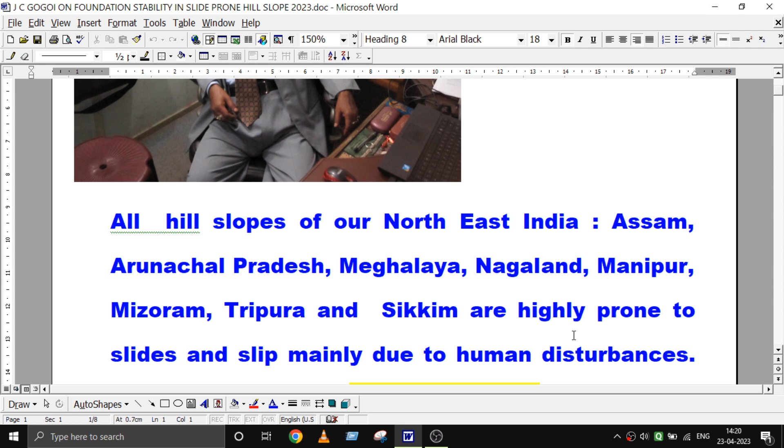Even our adjacent country, Bhutan, also notices many slides nowadays. Earlier, Bhutan was completely stable. There was no report of any slides.

I am always commenting that all natural slopes, hill slopes, are stable unless otherwise disturbed by humans. Due to natural calamities like earthquakes...

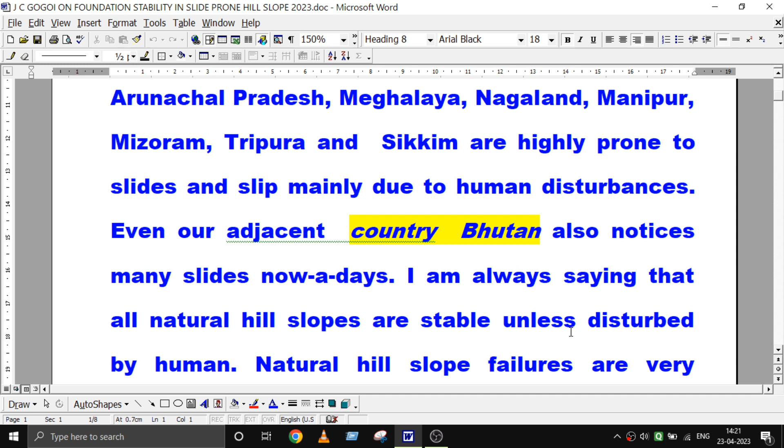basically, swift earthquakes have disturbed our formation to a great extent, but due to natural calamities, our natural hill slope failures are very negligible.

Destruction of hill slopes during the Great Assam earthquake of 1897, measuring Richter scale 8.3, and 1950, measuring Richter scale 8.7.

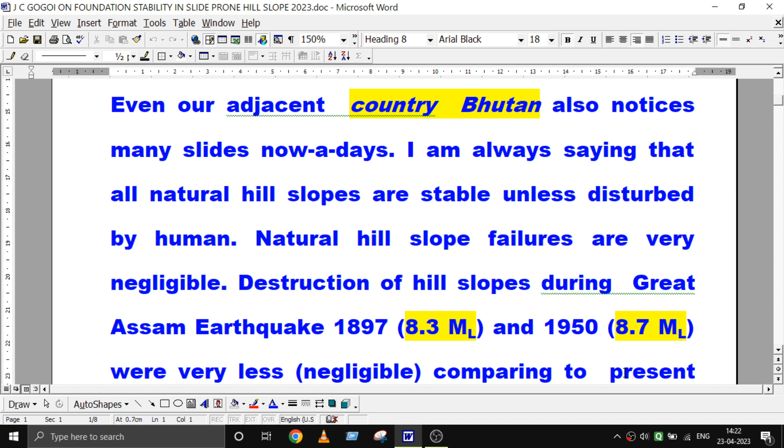These slides were very less, very negligible compared to present days. Of course, during those two major earthquakes, these are the biggest earthquakes in northeastern India.

8.7 is the biggest one, and the second is 8.3. These two earthquakes are the biggest in the northeastern region.

Of course, during these events, some destruction like river bank erosion, river course changes were noticed.

creating some dead channels. There are a lot of dead channels in Assam, like Mora Bharali, that is the Bharali river. It is a big river, but it has changed its course.

Many rivers had changed their course, some bank erosion, embankment erosion, damage of railway lines, etc. were noticed.

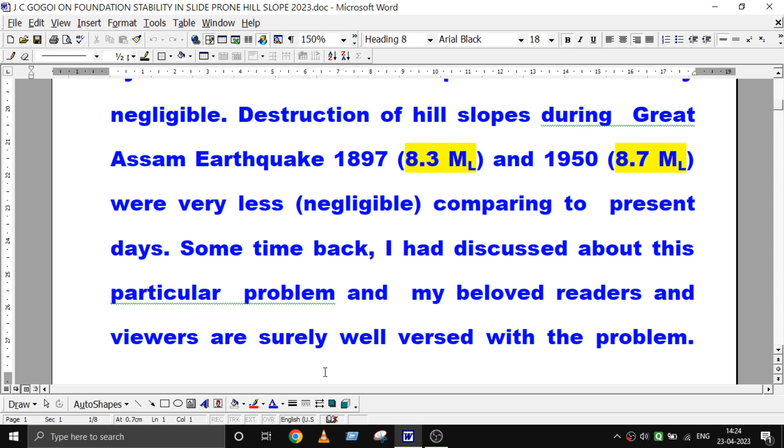Some time back, I had discussed this particular problem, and I hope my beloved readers, beloved friends, and viewers are surely well versed with the problem.

The basic reason behind these slides is that we do not care for our grandchildren, or we do not want to give them a healthy future. For that reason, we are not interested in saving our mother earth.

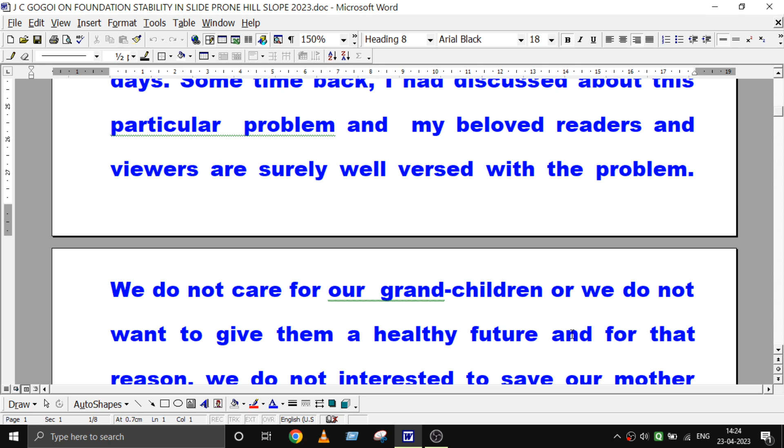We must follow nature. We cannot direct nature to behave at our own will, but we should follow the rules of nature, which we are not doing at all.

In the name of development works, we have always started construction of roads, cutting huge landmass - huge hill slopes we are cutting.

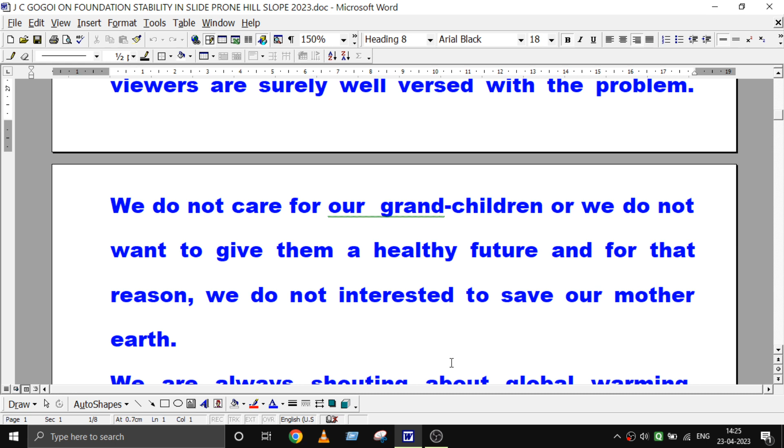and we are finishing our jungles, and a lot of destruction we are always creating on our earth's surface.

Yes, we do not do anything. We are always shouting about global warming, climate change, ice melting.

hot air waves, raising of water level above the present mean sea level.

and we are celebrating World Environment Day, World Forest Day, World Earth Day, World Wildlife Day, and many more.

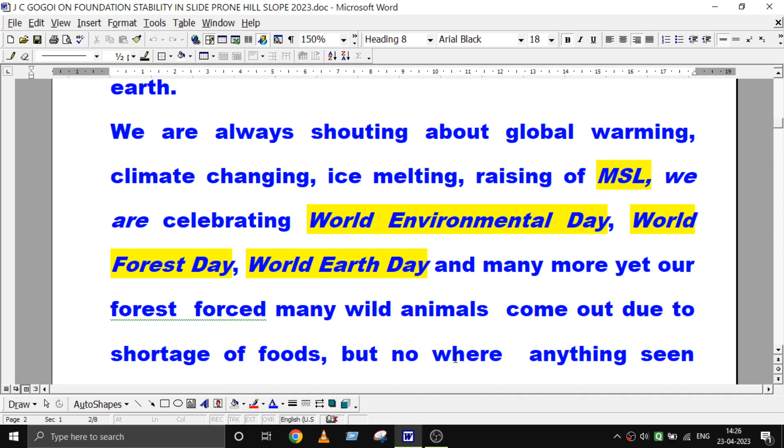Yet our forests force many wild animals to come out from the jungle due to shortage of food. But nowhere is anything being noticed...

except some workshops, seminars, conferences, talk shows, and this type of thing - only some valuable articles were published, and nothing more than that.

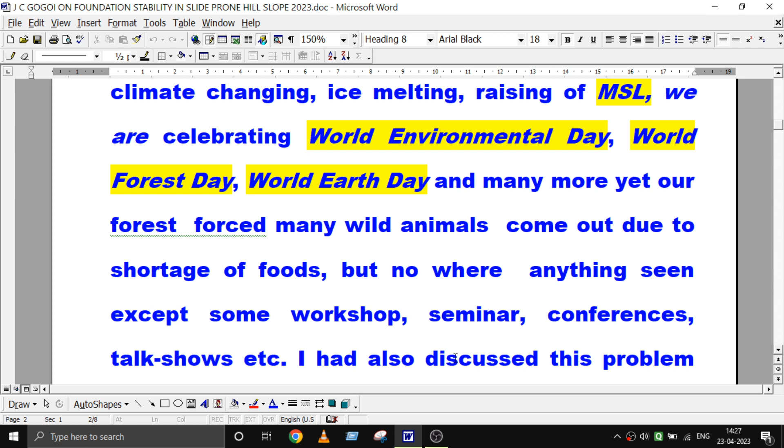At least in my notice, I find nothing. I had discussed this problem some time back regarding this man and wildlife conflict. I hope my beloved friends shall surely recall it.

However, these are the general pieces of information I am interested to give you, because much of you, or all of you, are not aware of this problem of our northeastern people. We are daily facing, we are daily suffering from this situation.

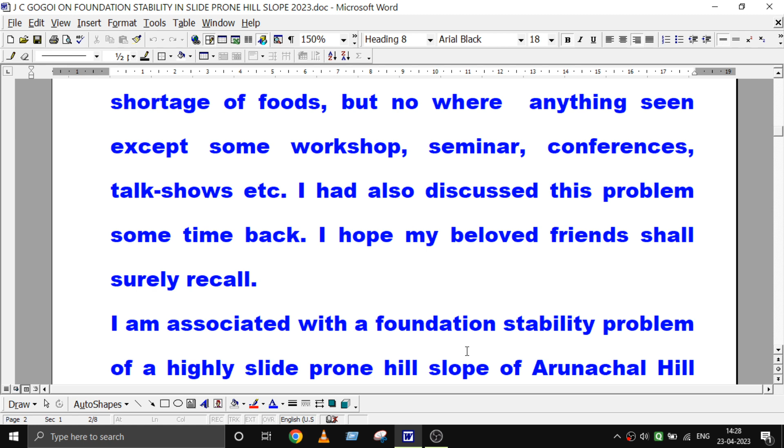At present, I am associated with the foundation stability problems of a highly slide-prone hill slope of Arunachal Hill, located at latitude 27 degrees 32 minutes 55.6 seconds

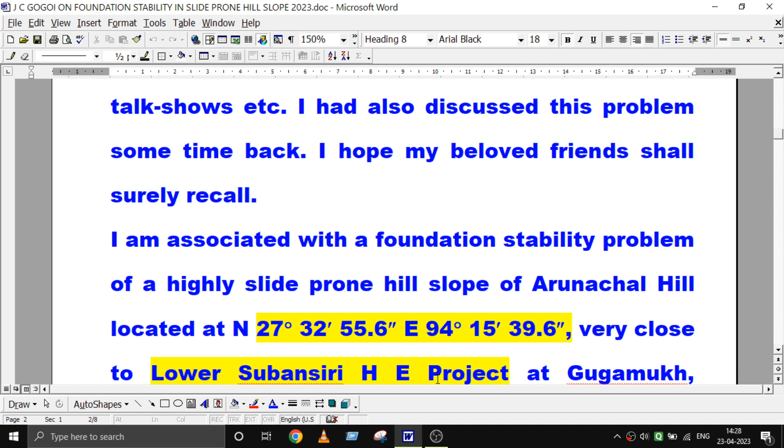and longitude 94 degrees 15 minutes 39.6 seconds. The site is very close to the Lower Subansiri hydroelectric project at Gugamukh, Dhemaji.

The formation is such that in Subansiri there are three major hydro projects. One is Upper Subansiri, which is located in Arunachal Pradesh at Upper Rish, and the Middle Subansiri, which is located at Taman, Arunachal Pradesh.

and the Lower Subansiri, it is located at the boundary line of Assam and Arunachal Pradesh.

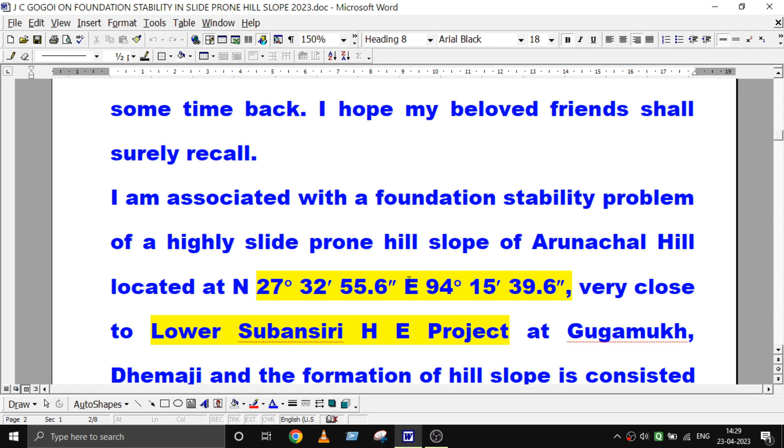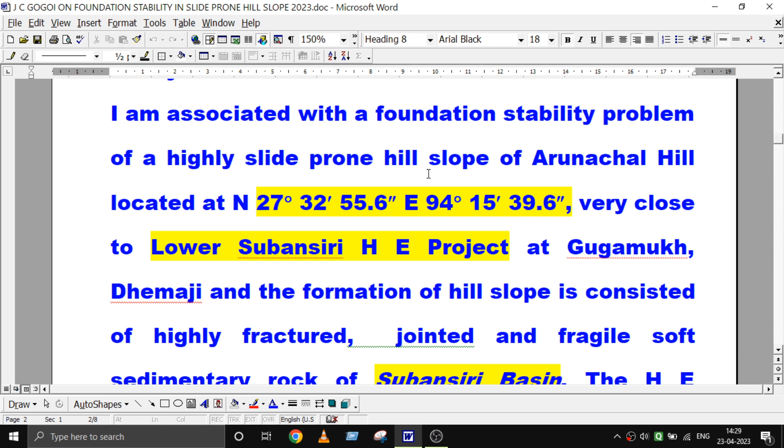The formation of the hill slope consists of highly fractured, jointed, fragile soft sedimentary rock of the Subansiri Basin. The hydroelectric project works are highly affected by landslides and slips. Many times structural collapses are noticed, like guardrail failure, blockage of tunnels, and more. They are always suffering huge cost involvement and long time effects.

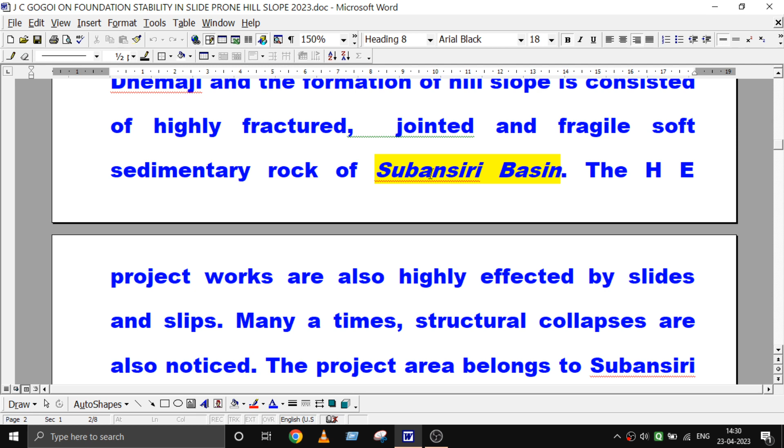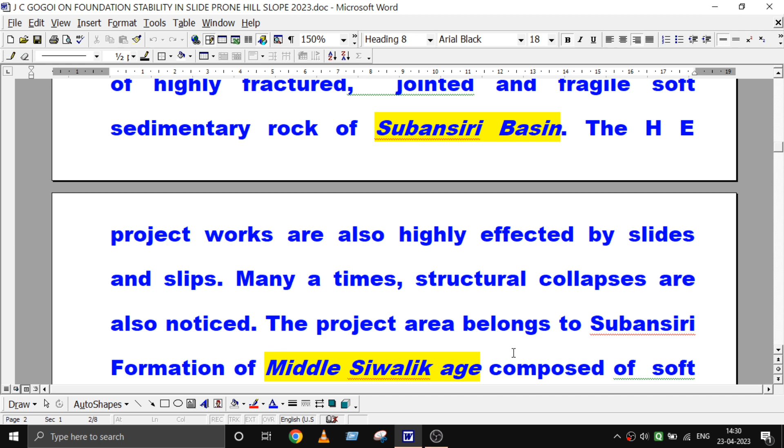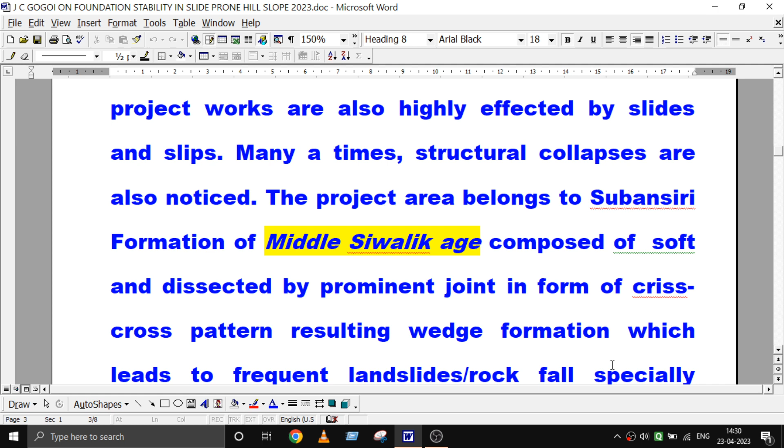The project area belongs to Subansiri Formation of Middle Siwalik, composed of soft rock dissected by prominent joints in a crisscross pattern, resulting in wedge formation which leads to frequent landslide and rockfall, especially during monsoon period. The parent sandstone is fully charged with rainwater along the subsurface water, which is vulnerable to the stability of the sandstone.

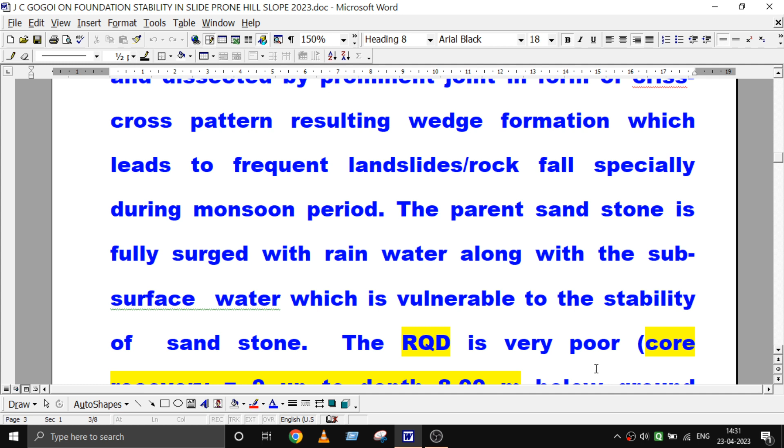Very interesting thing - we are saying it is sandstone, but it is so heavily jointed and fractured that RQD is very poor. Even core recovery up to a depth of 8 meters was recorded at zero.

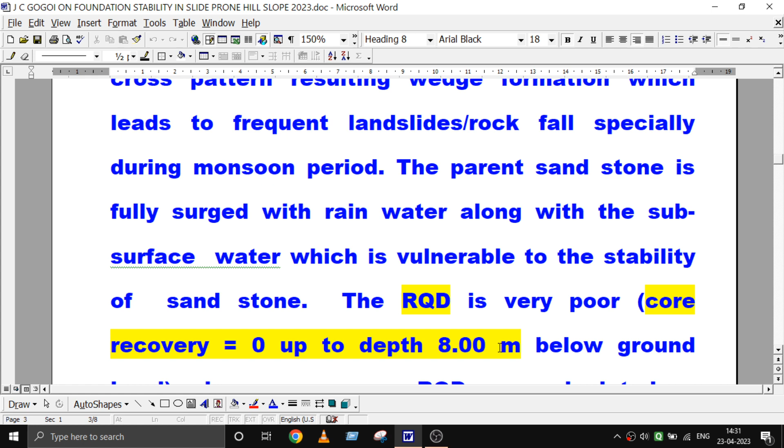We have made a few bores there, drill holes, up to the significant depth of the foundation, which is about 18-20 meters below the foundation level. So this RQD, average RQD, is recorded as 29% only.

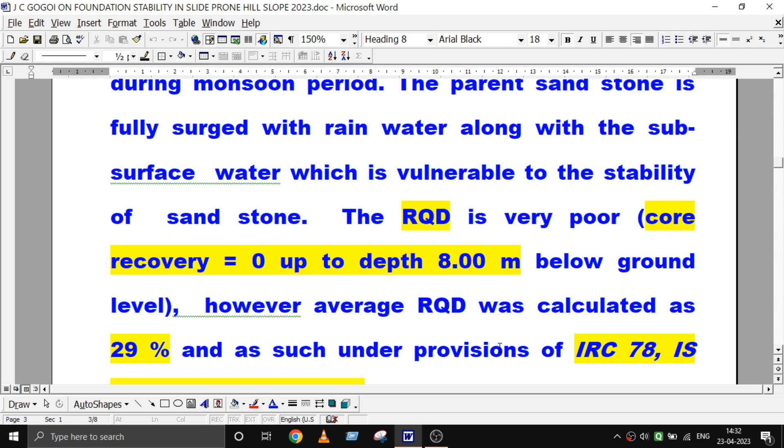Our Indian codes - IS, IRC, Indian Railway Board - do not have specification regarding slope stability. Normally, they are also following IS and IRC codes. As per our condition, Indian standards IRC 78, IS 4464, and IS 11315, the formation has been considered as grade 4 rock, which is decomposed rock. As per IS 1498 also, this type of rock is decomposed rock.

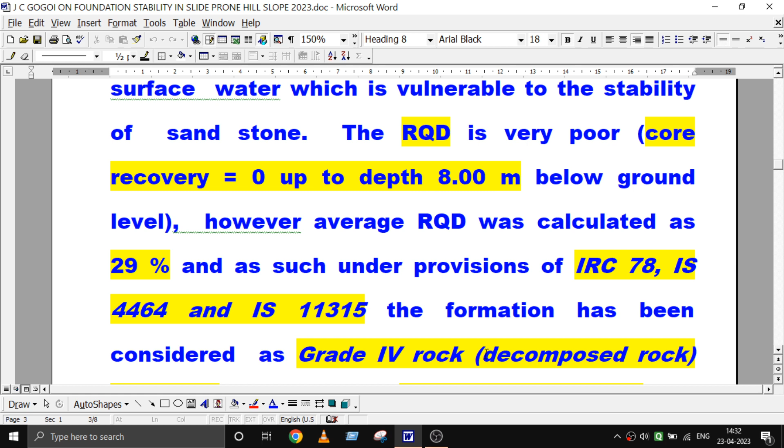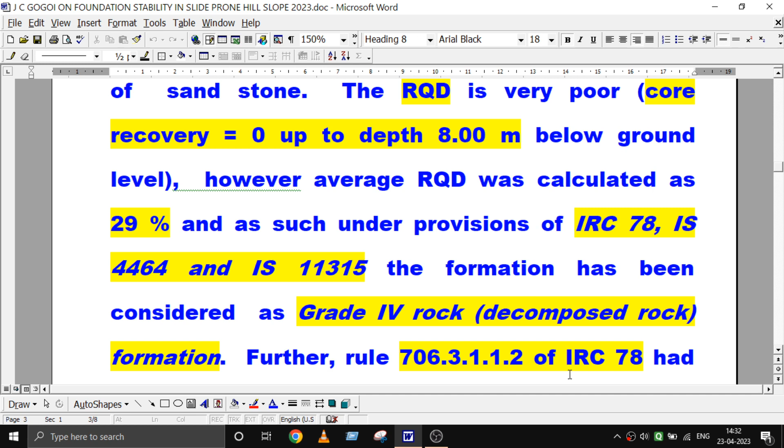Further, Rule 706.3.1.1.2 of IRC 78 recommends considering this type of formation as soil only, not rock. Just after little degradation of the quality, it will be considered as poorly graded granular soil - it will be poorly graded SP. Even all the cuttings appear like poorly graded medium grain sand.

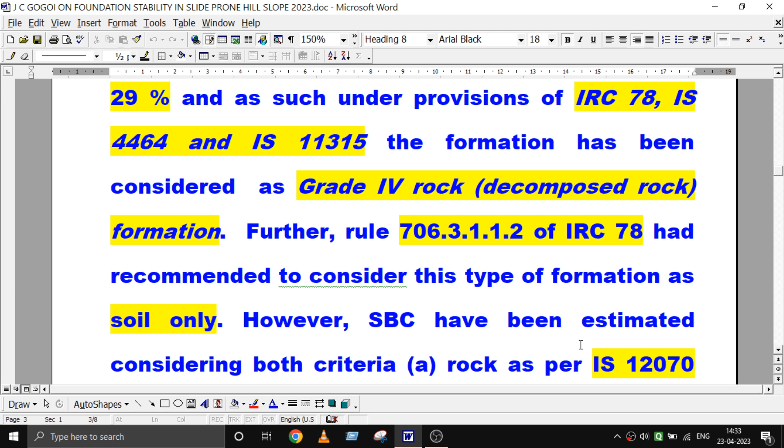However, SBC has been estimated considering it as rock using provisions of IS 12070 and IS 13063, and accordingly, if we consider it as soil, IS 6403, 8009, and IS 1904, adopting a safety factor of 8 for rock and 3 for soil.

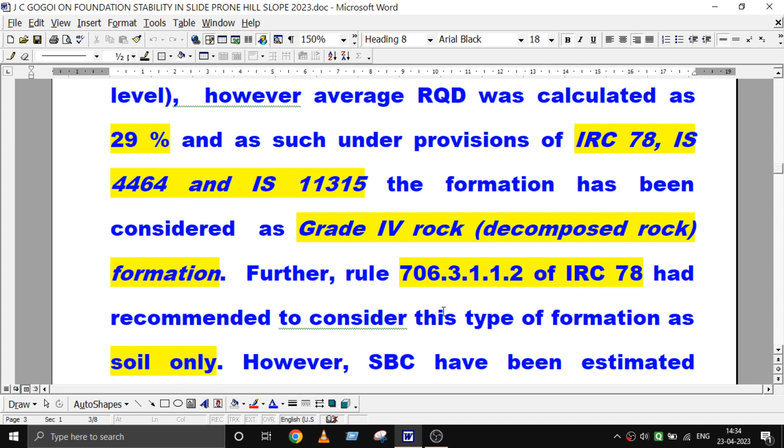This IS 12070 is the code for estimation of SBC based on field and laboratory test results, where joint frequency, joint spacing, thickness of joints, UCS - uniaxial compressive strength - and RQD are considered; using all of this we can calculate the SBC.

And IS 13063, we can estimate the settlement of the foundation in rock formation. Whereas in case of soil formation, 6403 is applicable for estimation of SBC of soil, 8009 for estimation of settlement of foundation, and 1904 is specification for stability analysis of soil.

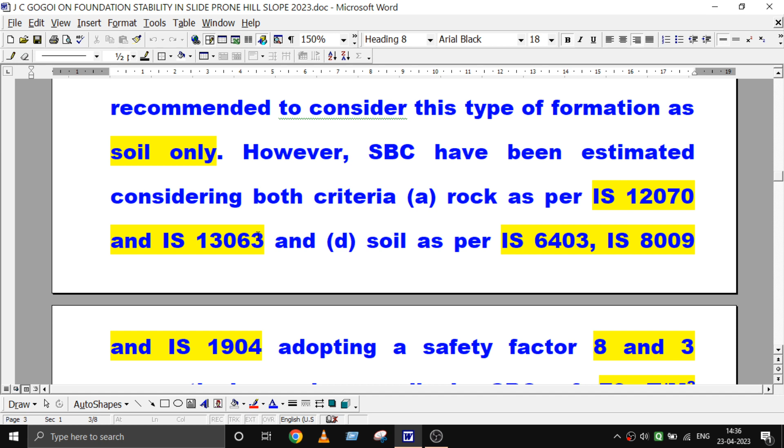Whereas in case of rock, 13063 also has some specific provisions for foundation stability analysis. The safety factor for soil shall not be less than 2.5, so we are adopting 3, which is little higher than 2.5. So we fulfill the codal provision.

And safety factor for rock, it is 8. We are adopting 8 since it varies from 6 to 8. So we are adopting the higher side to provide more safety.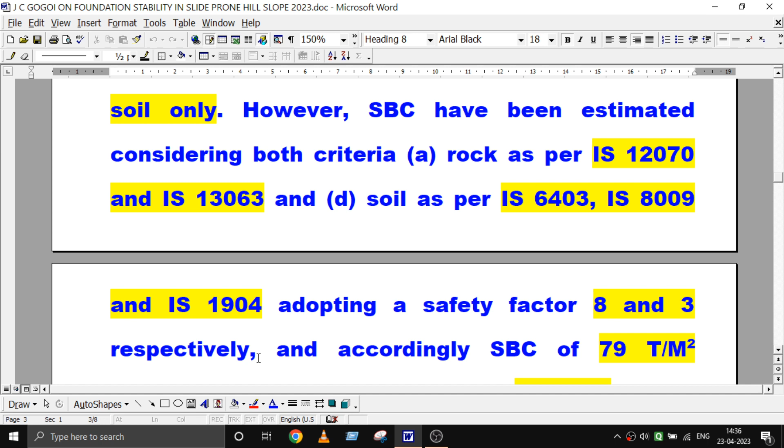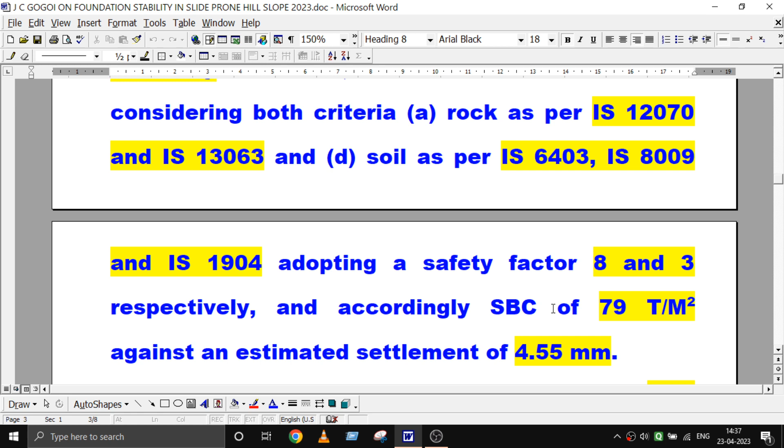Accordingly, we have calculated the safe bearing capacity as 79 ton per meter square against an estimated settlement of 4.55 mm, which is quite good. There is no threat of foundation failure, either as SBC failure or settlement failure of any kind.

Our permissible limiting settlement is 12 millimeter as per IS 13063, while our permissible settlement for soil, if we consider it as granular sand, it will be 60 millimeter. We have anticipated our settlement will be 4.55 mm. From SBC criteria, it is quite safe.

Our design load is 68 ton per meter square, whereas we are getting 79, which is little higher, with a safety factor of 8, and permissible settlement of 12 millimeter. We are estimating it as 4.55, so there is no chance of any shear failure or settlement failure of the foundation. The basic problem is the slope failure, which I have already discussed earlier.

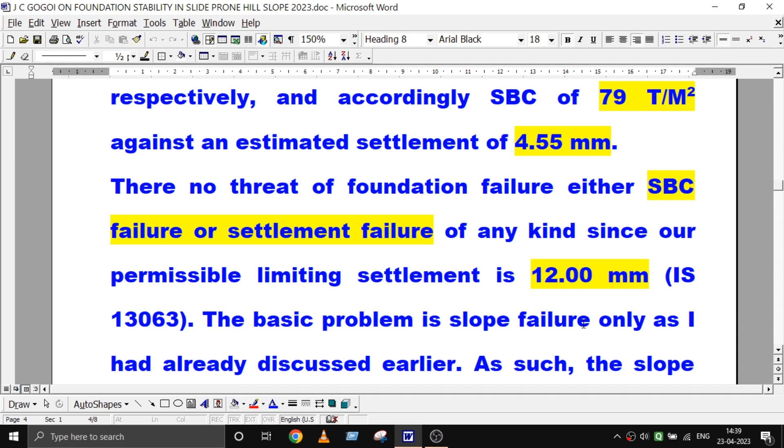It is the main problem of slope failure. When there is some little slide, the foundation may be tilted because the foundation has huge horizontal load, since it is a very tall transmission tower. The entire generated power will be coming through these towers, and it is located at some lower elevation of the top of the hill. So there are chances of overturning of the foundation until it is quite safe. If there is even a little amount of slide, the life of the tower cannot be assured. So slope failure is the principal problem of this area.

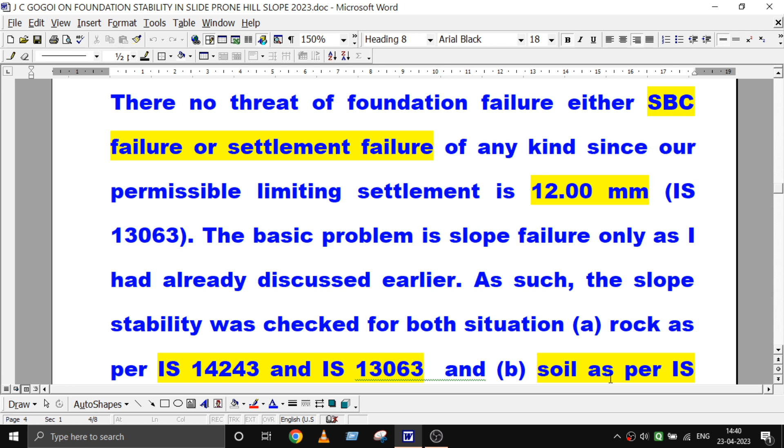As such, the slope stability was checked for both situations. Situation number one, considering rock as per IS 14243 and IS 13063, and situation two, considering soil as per IS 1904. We cross-checked both conditions, and we observed that the provisions of 13063 and IS 14243 are not appropriate because it is not rock.

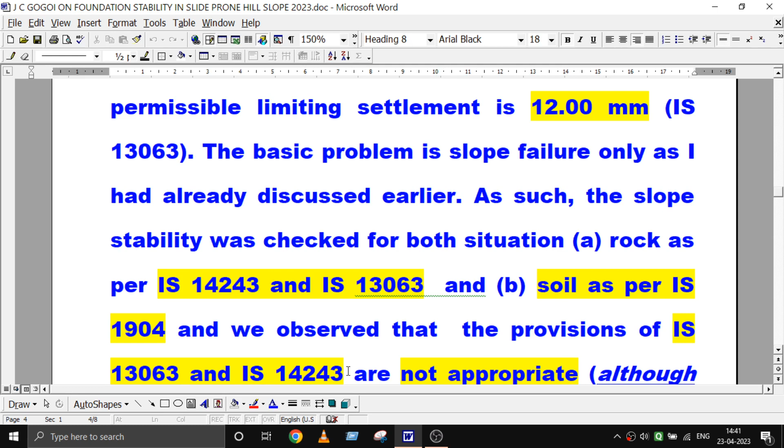It is not rock. We cannot consider it a hard rock. Had we gotten the code RQD as 80%, then we should adopt this codal provision straight out. If there are minor joints or minor cracks, we can rectify those by cement grouting, chemical grouting, or using some adhesive. It can become a monolithic structure, so there would not be a serious problem. But basically it is not rock, so these codes are not appropriate, although considering this code, our hill slope appears very safe and stable enough.

If we look very casually, then it is quite safe and stable. But if we consider details from the ground level, the bore and drill hole data, shear strength, joint spacing, joint thickness, other behaviors, and recent past failure history, then we find it is a highly weathered, decomposed, jointed and fragile, soft sedimentary rock, for which additional precaution was considered essential.

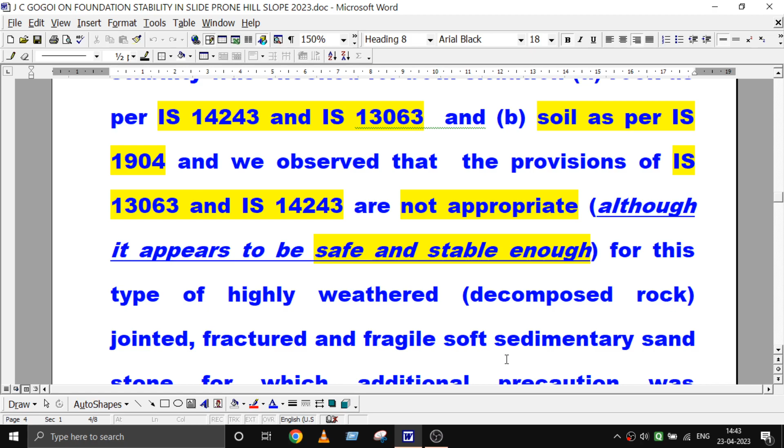Regarding this stability, which I shall explain, considering soil - the basic difference between rock and soil is this: the stress distribution angle is 30 degrees to vertical in case of rock. If it is hard, solid rock, then the stress distribution angle to vertical is 30 degrees, and IRC suggested a 1 in 2 slope, which will be little steeper, around 27 degrees or so. In case of soil, it is 60 degrees to vertical, as per IS 1904.

In the code, for sloping ground, these are clearly given: the soil surface line should be 900 mm above the stress line. This is what we call the 30 degree stress line, since it is 60 degrees to vertical. There shall be soil surface of about 900 mm above this 30 degree stress line.

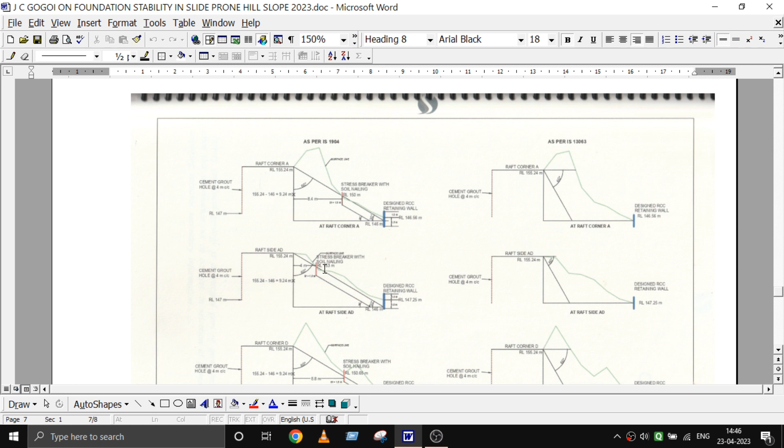But in this location, and this location, and this location, there are three locations towards the downward root side where this 30 degree line intersects the ground surface line. When it intersects, there will straightaway be a failure - this slope will fail. And otherwise, if you go here, it is not 900 mm, it is much less. Here also it is not 900 mm, it is much less. And here also, at this point, it is not 900 mm - instead of 900, we are always considering it as 1 meter. So you see, here is the basic problem.

So it is not safe. In case of rock, it would be safe, provided it is very good rock - not excellent, but good rock with RQD 80% and UCS above 200 kg per cm square. Then it is a hard rock. But here it is not 200 kg per cm square, it is much less. And joints are very frequent, and the joint thickness is much more - normally it shall be 1 millimeter or 1.5 millimeter, but here it is in terms of centimeters. And here it already intersects.

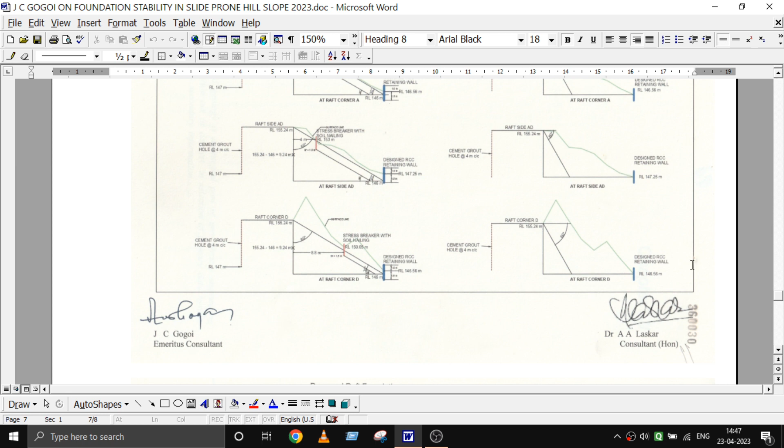So these are the differences. If we consider rock, that consideration cannot be accepted because it is not 100% hard, good rock. So we are bound to consider this as soil foundation - dense granular soil. So we have to take appropriate care for this slope stability.

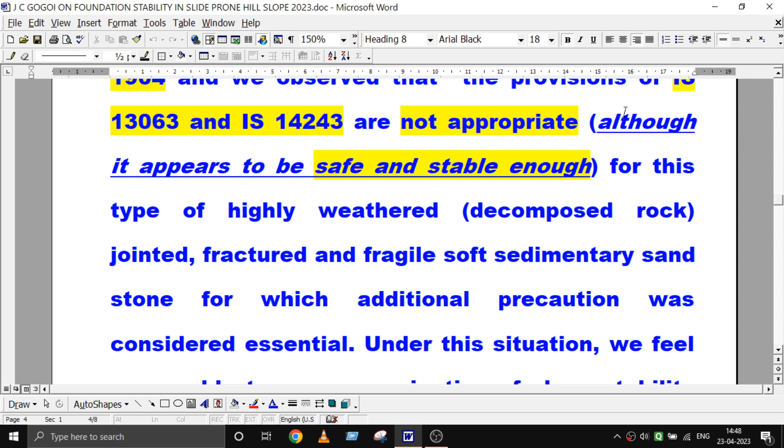So we decided for cross-examination under all conditions, and finally our slope stability provisions as per 1904 and IRC 78. The following summary of analysis is enclosed as ready reference, which I already showed to you.

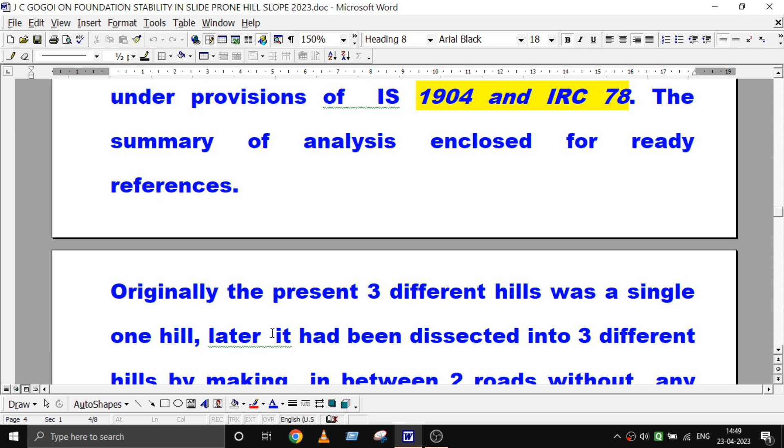Originally, the hill was one single hill. Now it is dissected into three different hills by constructing two in-between roads for communication. At the time of construction of the headworks and other ancillary works for the hydroelectric project, two in-between roads were constructed, which dissected the upper hill into three parts.

So in these three parts, this lower part where our foundation is located, the river Subansiri is located very close to that tower. That is also another major problem we have to tackle.

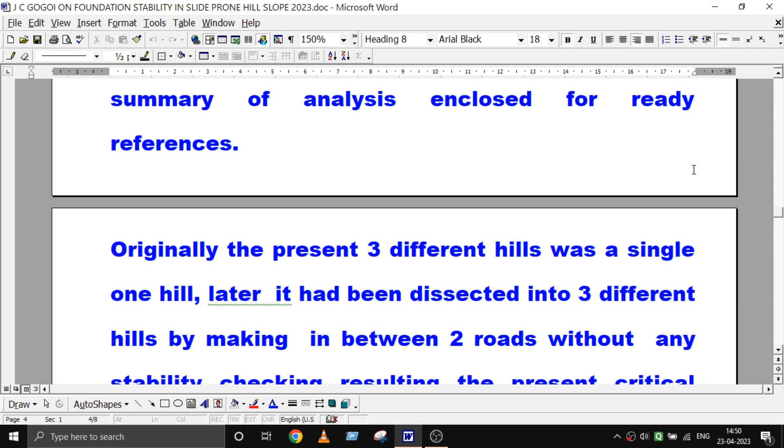So this dissection of the one single hill into three hills is also a man-made disturbance. You may not agree, but in my opinion, it is man-made disturbance to the natural hill.

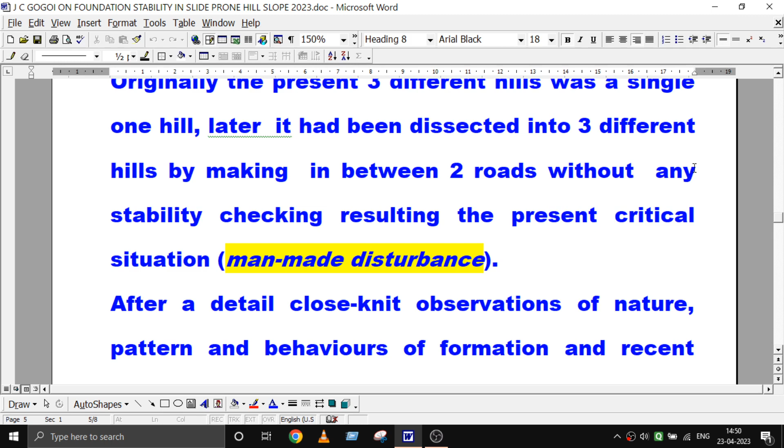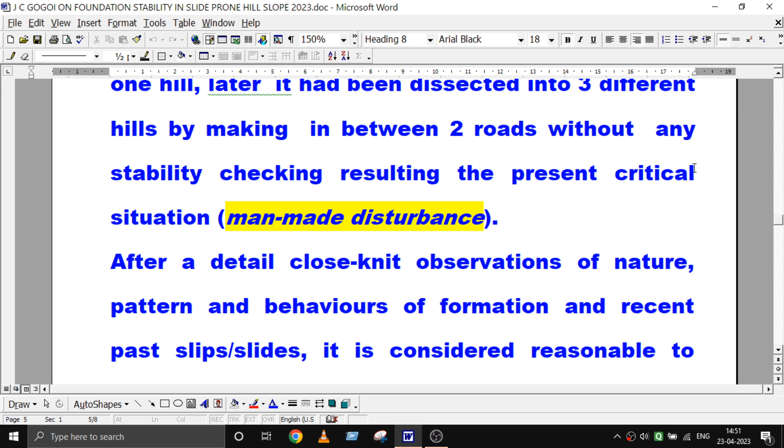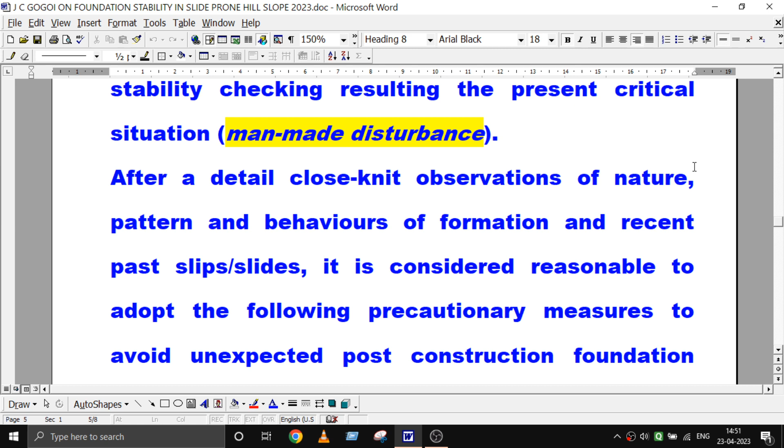After a detailed, close-knit observation of nature, pattern, behavior of formation, and recent past slides and slips of the hills in this hydroelectric project works, it is considered reasonable to adopt some precautionary measures to avoid unexpected post-construction foundation problems.

Basically, I am interested to safeguard my foundation only. Because for me, my foundation is much more than anything else, since if my foundation fails, then the whole structure will fail. The whole transmission line will fail. So, first of all, our attempt is

cementation of the formation by filling the gap with cement grouting for monolithic behavior of the fractured and jointed rock mass.

So we decided to take double benefit of this process of cement filling. Then we shall anchor the foundation with the rock up to a significant depth of foundation, or at least the minimum soft zone, which as I said earlier is up to 8 meters, it is almost zero. If we anchor the foundation up to 8 meters, the below portion also automatically, under pressure, cement grout injection shall necessarily be followed up to a reasonable depth. So another 4 or 5 meters of that portion will entirely be monolithic.

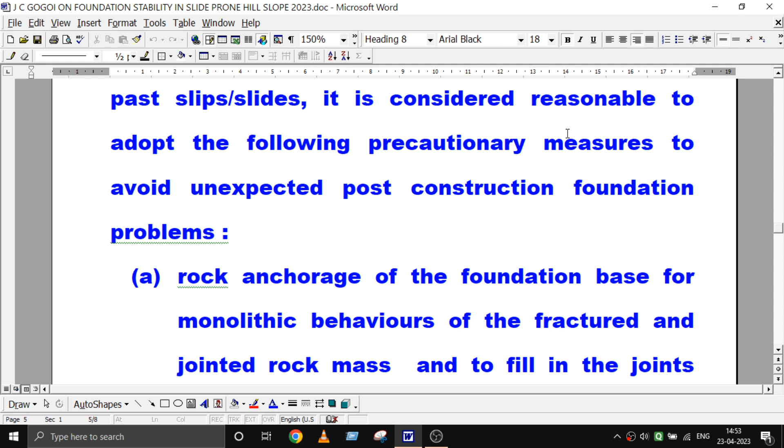So considering that aspect, we are providing cement grouting with a proportion of one cement to half sand, fine to medium grain sand, with a water-cement ratio of 0.45. This is M35 grade concrete.

And in case of cement grout, in my laboratory test, using that sand itself which we brought to our laboratory for analysis purpose, I find somewhere it is 45 MPa, somewhere 40 MPa, somewhere 39 MPa. So we can guarantee that it shall be M35 grade concrete.

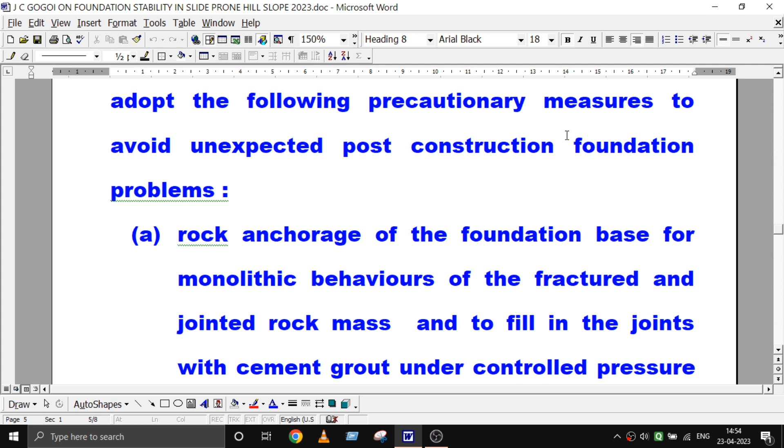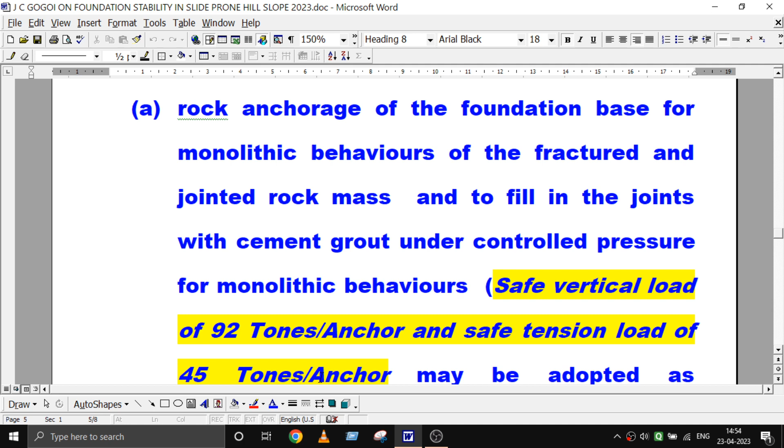So, in addition to this, if we provide some required bars, we can get 92 tons per anchor, and a tension load of 45 tons per anchor may be adopted as a windfall. So at a single time, we are getting additional load against overturning, and we converted the fractured and jointed formation into a monolithic one with the help of bars, and also the joints were filled with rich cement grout.

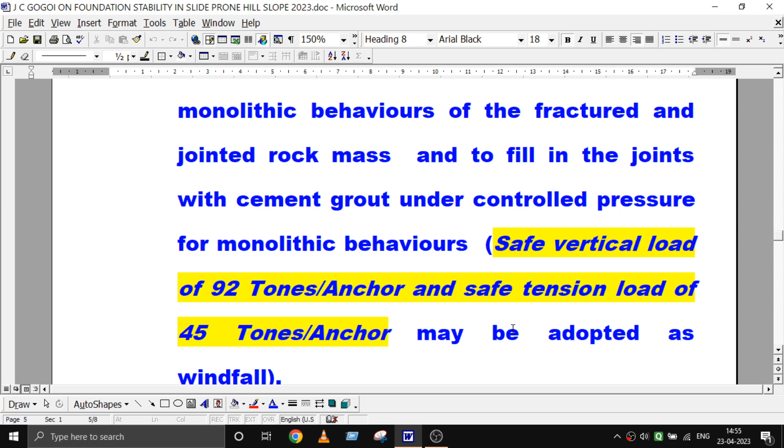What we did, let me show you and explain. This is the proposed raft. We are bound to provide a single raft because there was no sufficient space for an isolated foundation. So we provided one solid raft.

It was originally estimated as 30 mm, but 30 mm bars are not available and would need to be ordered. So it was provided as 25 mm, 5 numbers of bars.

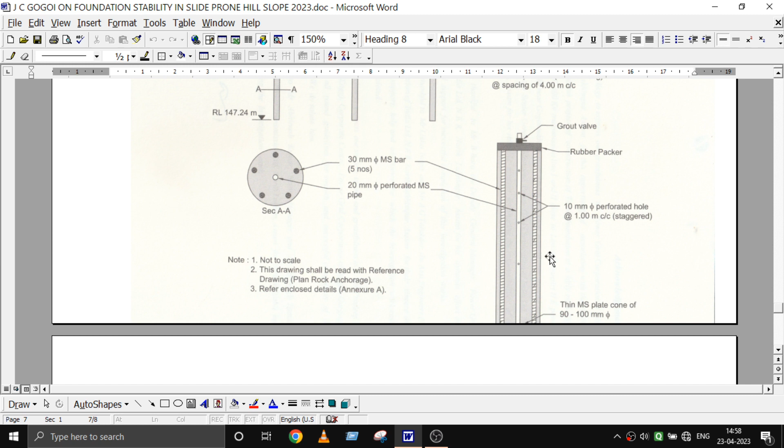So the basic purpose with these rods shall anchor the foundation. This rod shall anchor the foundation, and additionally we will be getting some resistive forces against overturning. We do not have any fear for the shear failure or SBC failure. We are only trying to prevent the slides. So it will be a monolithic behavior, since all these bars will be there, and the grout shall be penetrated in this way.

We are providing our grout pressure at 20 ton per meter square, and we require only 4 meter area. Since it is 4 meter spacing, center to center. Here it is 2 meter, outside is 2 meter. So instead of 4 meter, we are providing 20 ton per meter square pressure, that is 2 kg per cm square.

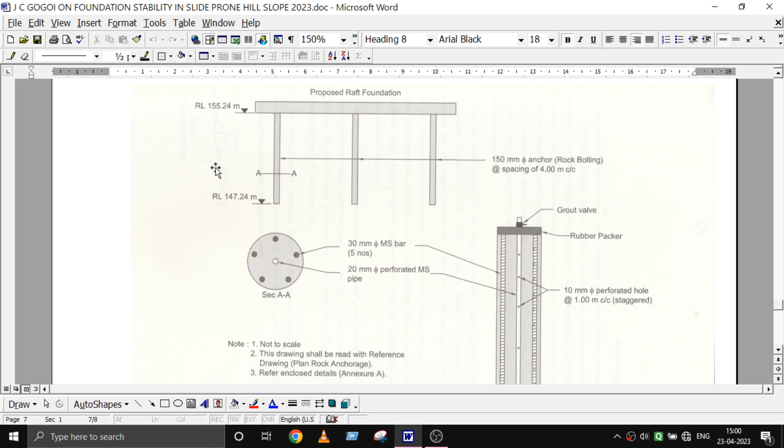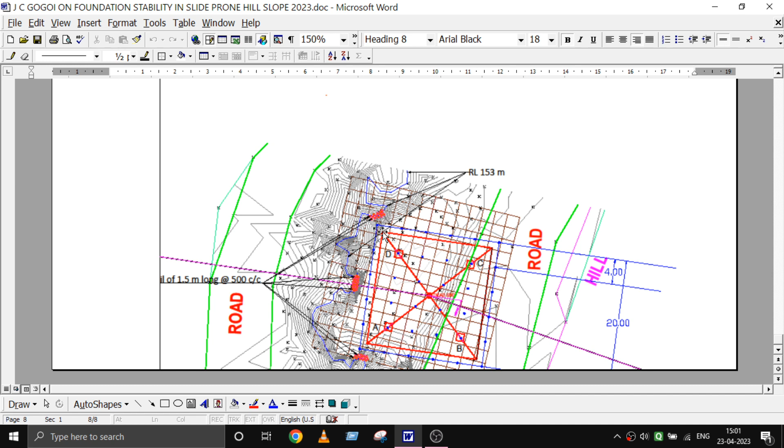Bar shall give us this much of load, as I told earlier. So we are trying to take adequate care against tilt of the foundation, and for that we have to first try to convert the formation to good. Instead of poor, we are trying to convert it to a good formation, which gives 45 ton against tension load.

So there are so many anchors there. So we are getting good numbers, good resistance against overturning forces. So I hope this will act properly.

The work has been done under my direct supervision, although I have not always visited there. But our one chartered engineer and some senior people were there, and 24 hours I am monitoring from here. So I am getting everything in time, instant information. I can guide them. So it is very nice teamwork, in fact it is very nice teamwork.

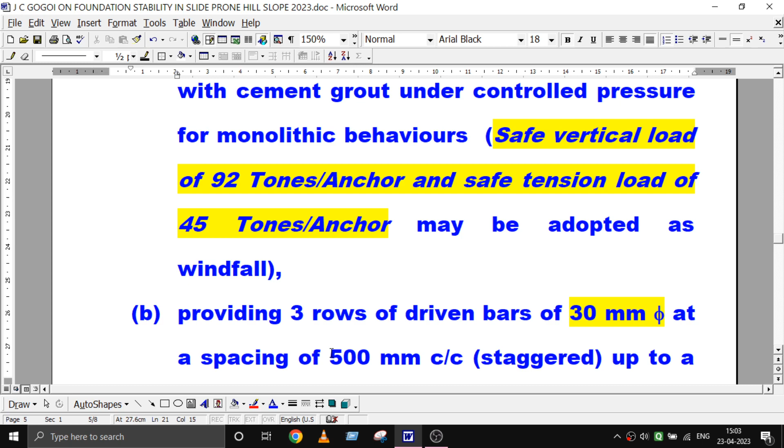Another thing is, as I told, here you see this stress line - the 30% stress line intersects the ground surface line. That is, our stress line is going out of the ground formation, instead of having adequate 1 meter surcharge. Already our stress is going outside the ground surface level. So it will surely need some extra precaution.

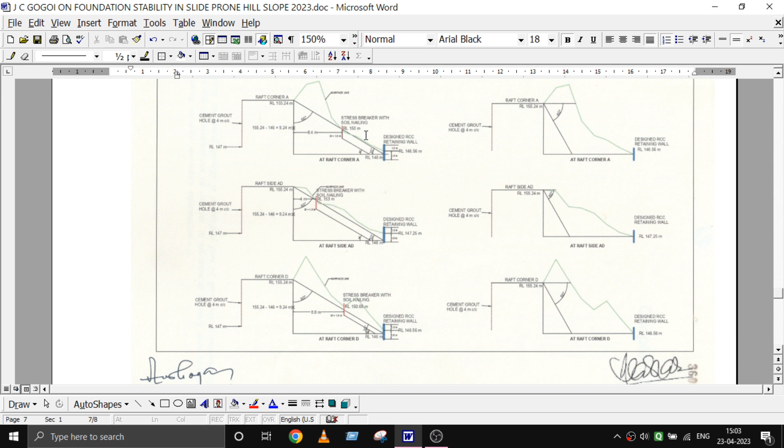What we did, therefore, you see this point, this point, this point, and you see this red box - this is one portion, here it is one portion, here it is one portion. This red, there are some small dots. I am handicapped because this page is, I cannot increase the size. So if you can download it, then you can see it in detail.

Spacings are there, proper spacings are there. There are 3 rows, I am showing you here. I am saying that we are providing 3 rows of driven bars of 30 mm. Since 30 mm is not available there, we are providing 32 mm at the cost of 30 mm, at a spacing of 500 center to center, that too in a staggered way. Staggered means in three rows at two different positions - the first and third row at the same row and column pattern, and the middle row will be shifted in between, with all middle numbers in between.

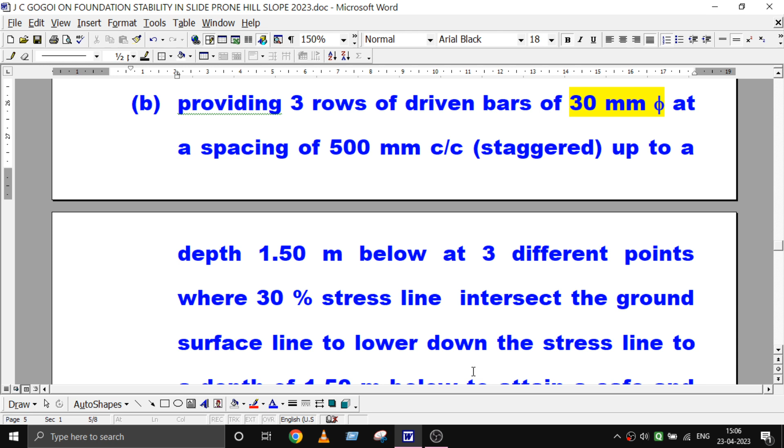These bars were extended up to 1.5 meter below ground level, where the 30% stress line intersects the ground surface line, to lower down the stress line to a depth of 1.5 meter below ground level, to attain a safe, stable hill slope and to get adequate surcharge.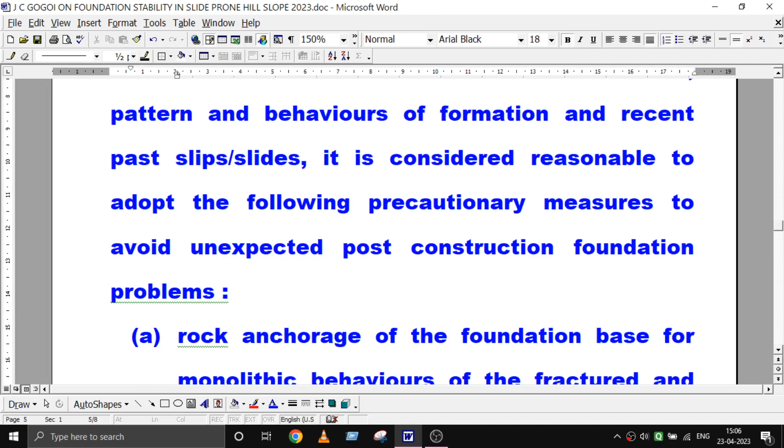See here, we need 1 meter ground surface above the 30% stress line as per our code provision. Since we are barricading the stress line by providing this in some places, it was successful, so I am sure it shall work here also very effectively and successfully.

You see this is the stress line, the 30% stress line. Above that stress line we need, say, 1 ton above the stress line for 1 meter, and if we are providing 1.5 meter, then we will be getting 1.5 meter.

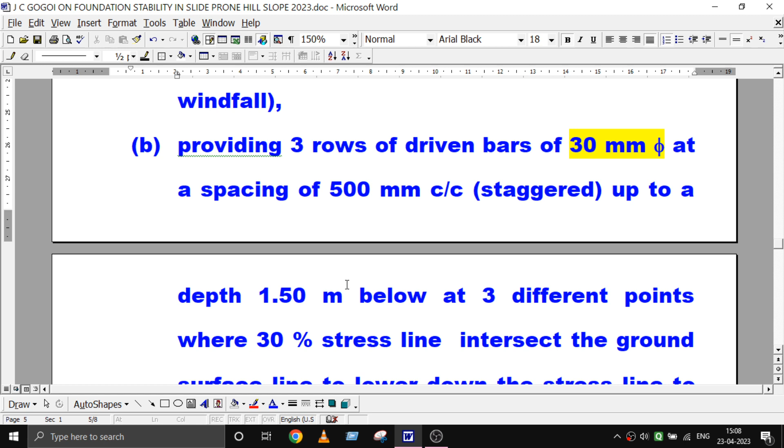What is the normal dry weight of sand? Dry weight of sand is 1.2 to 1.5. But we are providing much more, 50% extra. Here you see.

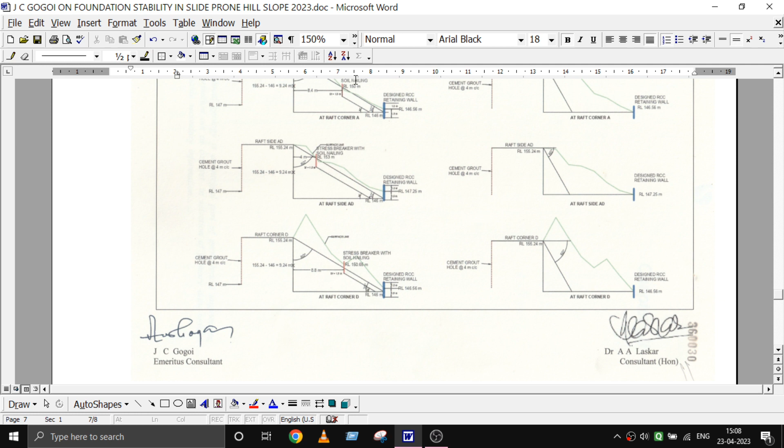From there, this stress will be diverted and the stress line is lowered down up to here. Earlier it was over the line, but due to the driving of the bars, it will come down 1.5 meter below. So additional surcharge, a little above the required surcharge, we are providing there, so that portion is also safe.

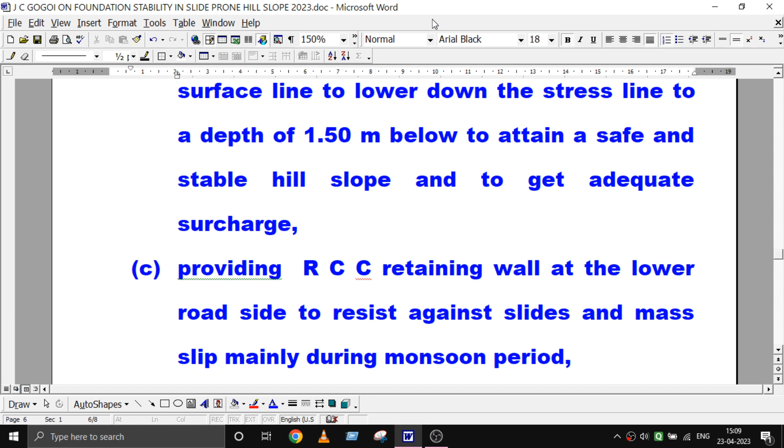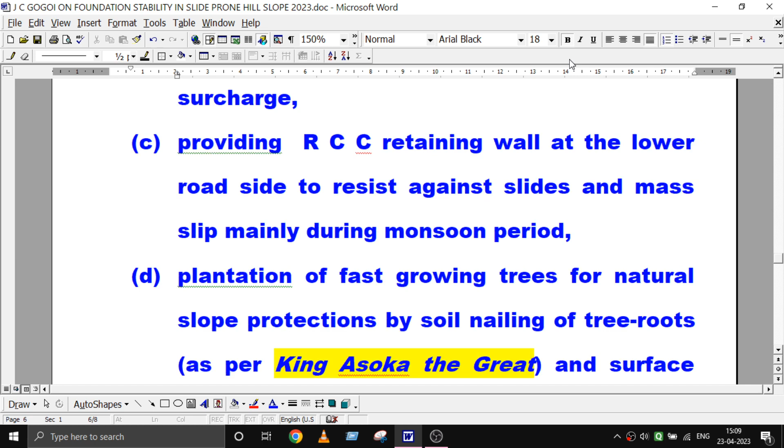Now next, we feel it is essential to provide a retaining wall at the lower roadside to resist against slides and mass slip. If the slide starts from the upper side, then gradually the lower side will be more affected; if it starts from the lower side, the slide shall be more, and the upper side also shall be more affected. So to resist against slides and mass slips, there must be some RCC retaining wall which we are providing at the road level.

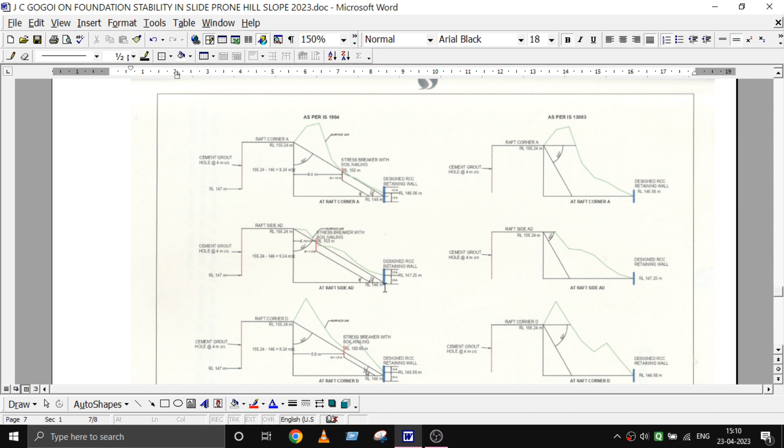You see, this is the road, this is the road, this is the road, and at this road level we are providing one RCC wall. This is the RCC wall, 1.5 meter below ground level, and 1 meter above we are keeping.

If some slides occur due to natural calamities, so that they are not going outside the hill, we prevent it by keeping the height of this retaining wall 1 meter above the ground surface level and 1.5 meter below the ground level. As per Indian Roads Congress specification, all retaining walls should be 1.5 meter below ground level, whether required or not, irrespective of any case.

Another most important work is natural slope protection, by plantation of fast growing trees for natural slope protection, by soil nailing of tree roots.

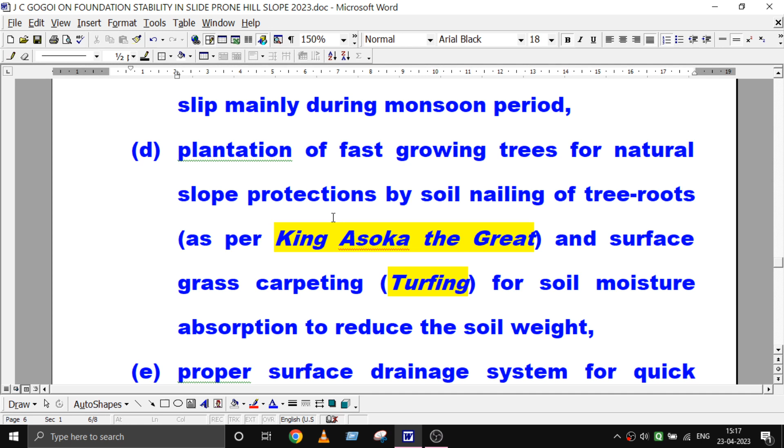Normally, when you remove a tree, a huge area was covered by the tree roots, at a big area. Some experts say that the roots penetrate twice the entire leaf area, two times more than the leaf area. Root area is twice the leaf area. So it is highly effective.

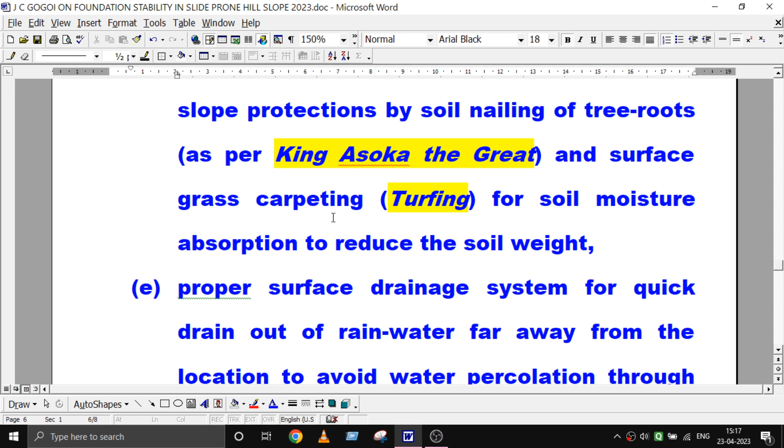Another important thing is a proper surface draining system for quick drain out of rainwater far away from the location, to avoid water percolation through joints and fractures, and to avoid block mass failure.

If we do not drain out the rainwater, the entire northeastern region, we have very high rainfall, and Arunachal has even more extensive rainfall. Arunachal is very close to Tibet, so there are always rains, almost every day, irrespective of any season.

In the plains of Assam, we get rain only during the monsoon period, but in Arunachal, winter, summer, spring, every season rains are normal.

So in such a situation, if we cannot drain the water a little away from the project site, this rainwater will percolate through the joints inside. Number one, it will increase the weight, and number two, due to water percolation, joints will become slippery.

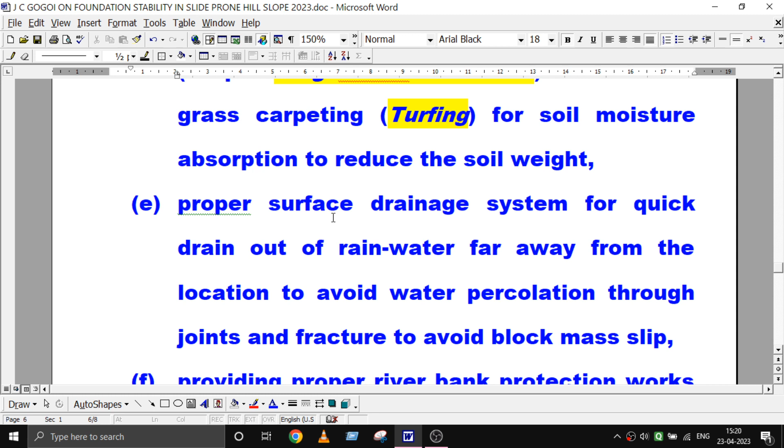To avoid that, we should drain out water with a proper drainage system a little away from the project site, so that water percolation can be avoided.

I personally discussed the matter with my clients and I have earnestly suggested and recommended the necessary bank protection at the lower road formation, very urgently required, since I have already noticed bank erosion, bed and bank erosion, and scouring. I personally noticed this at the bank slope.

Today it is at a little distance, but tomorrow there may not be so much distance. It may come within the effective zone of influence. So my humble suggestion to you.

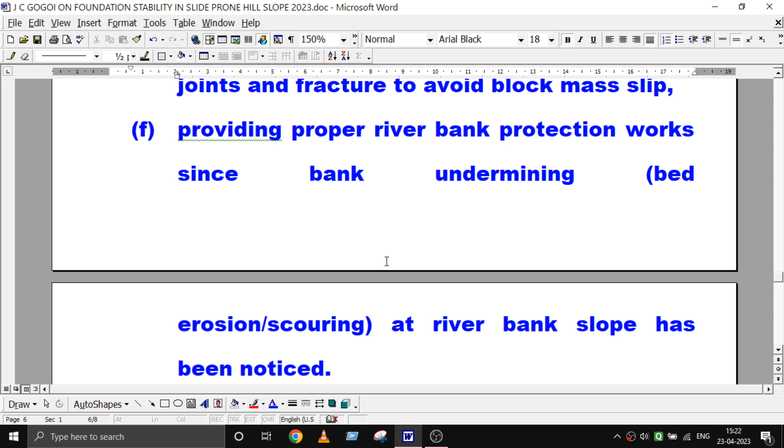Please give some pressure to the hydroelectric power authority and the transmission line authority to go for necessary river bank protection and area protection works for that effective bend. There is a meander there, and that meander should be protected very carefully to avoid further bank erosion and bed scouring.